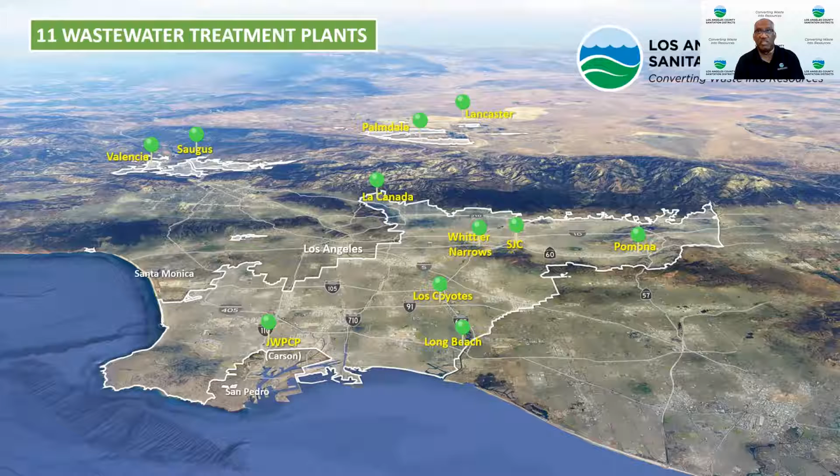From our humble beginnings, we now have 11 wastewater treatment plants. These pins on the map represent our 11 wastewater treatment plants. With our 11 wastewater treatment plants, we treat a little bit less than 400 million gallons of raw sewage a day. That's enough sewage to fill the Rose Bowl 4 or 5 times a day.

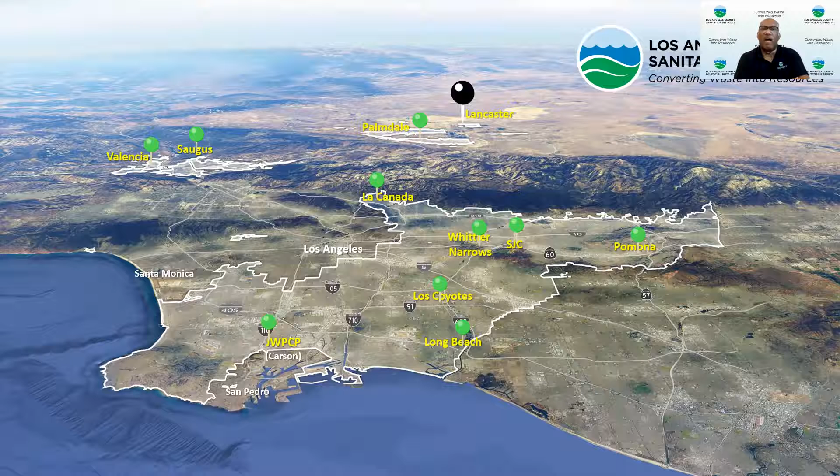And today we're going to focus on the Lancaster water reclamation plant. That's what you see with the black pin. And it's one of our 2 treatment plants in the Antelope Valley. And here's a great shot of the Antelope Valley from high up in the atmosphere. And so here's the Palmdale plant, which we toured last week, and here's the Lancaster plant.

Of our 11 wastewater treatment plants, these 2 are probably the trickiest to operate and manage, because our 9 other treatment plants in the southern portion of the county, when they produce recycled water, if they have excess recycled water, they have a water body they can discharge it to. They have a river or an ocean. These 2 don't, and that makes it really kind of tricky. If they have excess recycled water, especially in the wintertime, it's all discharged on land.

And it all flows to the northeast, and it winds up on Edwards Air Force Base from the Lancaster plant. And so we have to make sure every drop is accounted for. Every drop that comes in, we either recycle it, and if we can't recycle it or reuse it, we store it in a reservoir so it doesn't flow onto Edwards Air Force Base.

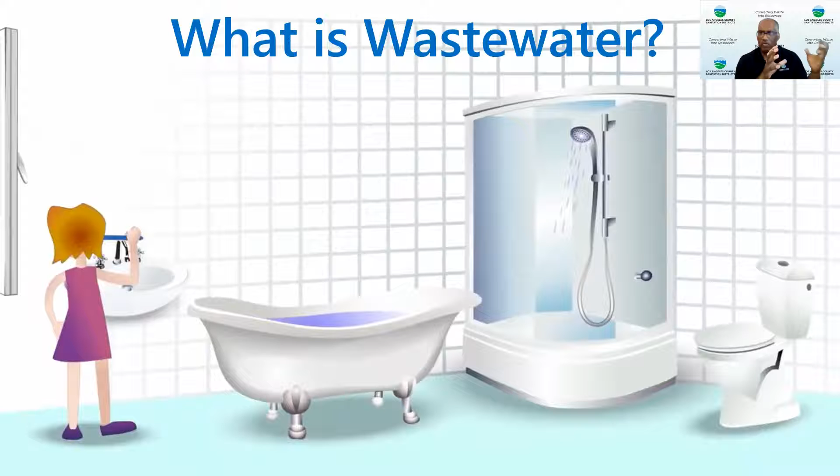So let's back up. What are we talking about? What are we cleaning? Wastewater or sewage? Most people think of it as the stuff that comes from your bathroom, your toilet, your sink, your shower. It's also what comes out of your kitchen. Whatever goes down your drain winds up at our treatment plant, and that's wastewater.

And how does it get to our treatment plant? Throughout the county, we have a network of trunk sewers, about 1,400 miles of trunk sewer. And that's how it gets to our treatment plant. But specifically, when sewage leaves your home or business, it leaves a lateral in your home, then it goes into a local sewer line that's owned by your city or the county. And then that local line feeds into a trunk sewer that's owned, maintained and operated by the sanitation district.

And I want to clarify one thing. We're not the county. We're a special district, like a school district, and we're tasked to handle wastewater. We call ourselves Los Angeles County Sanitation District because we serve Los Angeles County. We serve 78 of the 88 cities in Los Angeles County, as well as adjacent unincorporated areas, but we're not LA County. Our board, our bosses are the mayors and the city council people that sit on the respective sanitation districts, one of our 24 sanitation districts.

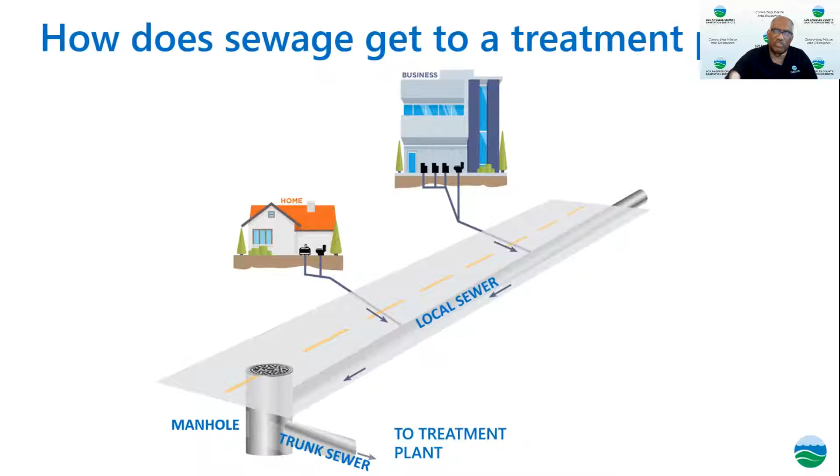And we have a shift that's usually here 8 hours a day. And in off hours, we remotely monitor this site. And if one of the valves or one of the displays goes awry, we'll send out an alarm, and we'll have someone come out, no matter what time of the day, to look into the situation and resolve it. Alfonso, do you want to add anything about the control room?

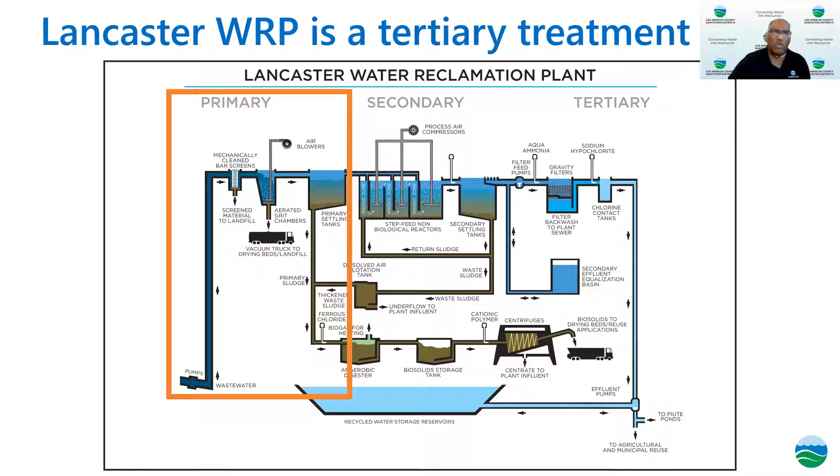So here's an influent pump building. This building has 5 pumps in there. They each pump about 10 million gallons, and they pump the water up to the ground level, and from there it starts the treatment process. So it lifts the water about 40 feet.

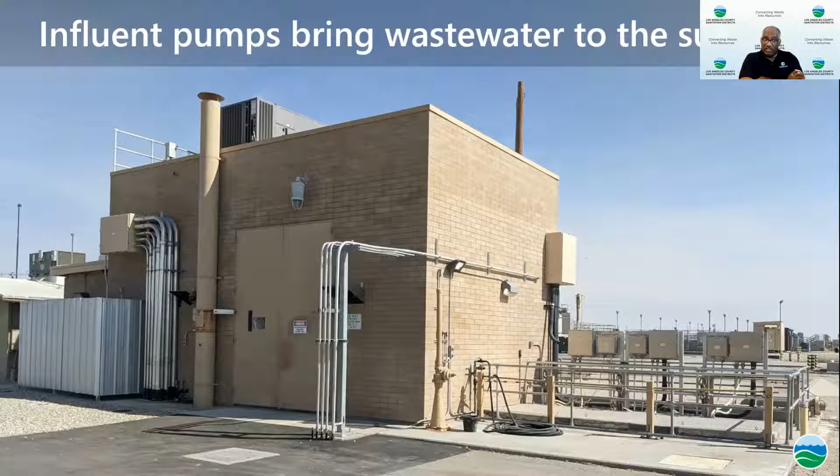I just like to add, our highest flow days is actually Thanksgiving, so we'll see from about 24 to about 30 MGD. So we have 5 pumps. So the plant on average treats what, like 14 million gallons a day? Yeah, 15 MGD. Okay, but during some of the high flow days, what do you see? Usually on the weekends, we'll see 21 to 24 MGD peak. And then, like I said, Thanksgiving will be from 24 to 30.

And then the highest wet weather flow, since I've been here, we probably peaked around 32, 33 MGD. So we need all those pumps. They provide redundancy when the flows peak up.

Correct. Hey, this may be a side, and I hope this is not a curveball, no pun intended. So do the flows go up when the Dodgers are playing? We actually do see, yes, higher flows during the Super Bowl playoffs too. Okay, so tonight you're gonna expect some higher flows at 5 o'clock. Yeah, probably higher ammonia load. No comment. All right. Thank you, Alfonso. Anything else you want to add? All right, no, he's good.

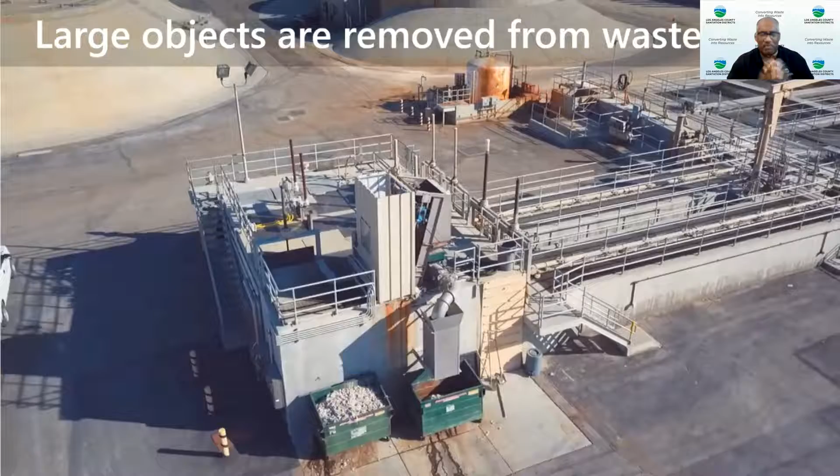All right, so influent pump building. And then we go to this building that removes large objects. You're looking at a drone shot. You have bar screens that remove large objects, rags, stuff that would clog up our pumps, that would require us to pull our pumps offline and declog them and reassemble them.

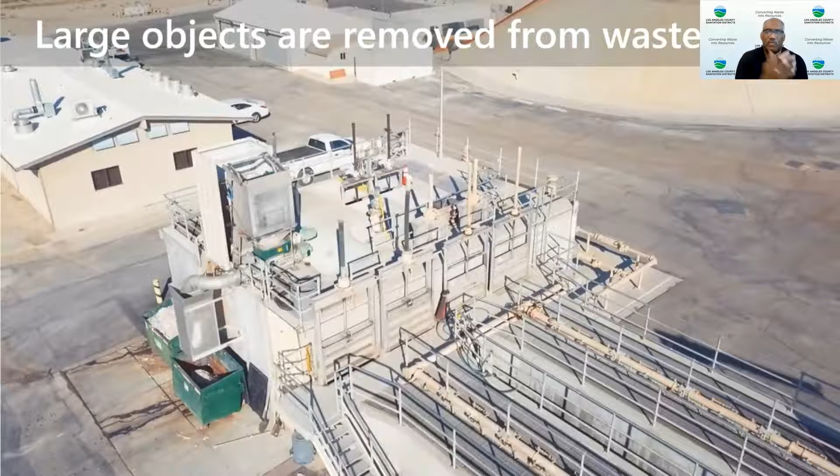Sorry, can you just quickly tell us what MGD is? Oh, my bad. MGD is million gallons per day. MGD, not a beer. Million gallons per day.

So in terms of Rose Bowls, you'll tell us. Oh, I'm kidding. No, later. You'll tell us in terms of Rose Bowls. Yeah.

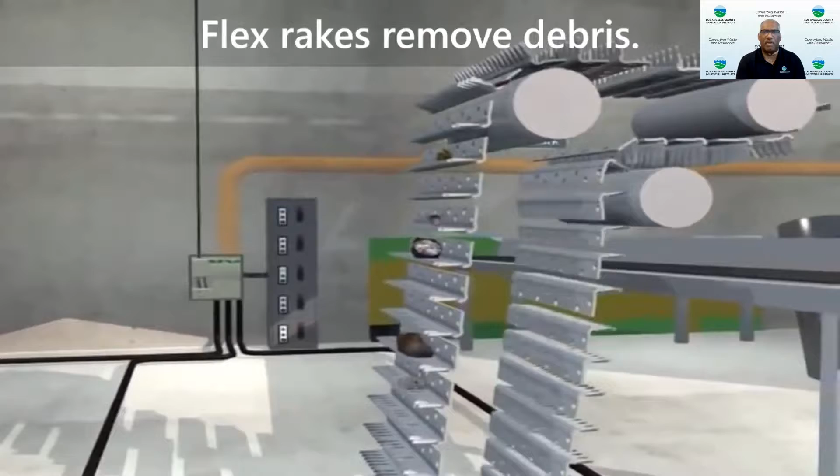All right. So here's what's going on in that building. We have these flex rakes that remove the debris. So basically they dip down into the water and they remove the debris because we don't want it going through the plant. It'll clog up the pumps. It creates a headache for Alfonso and the crew. And we have some actual footage. Usually on tours you don't get this.

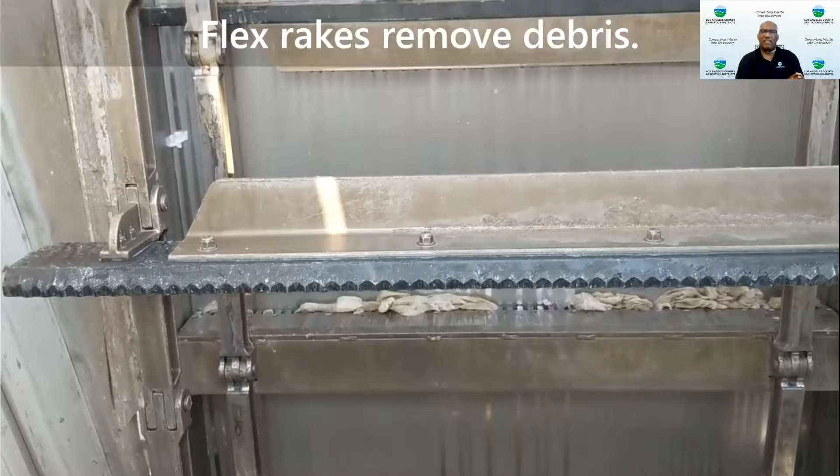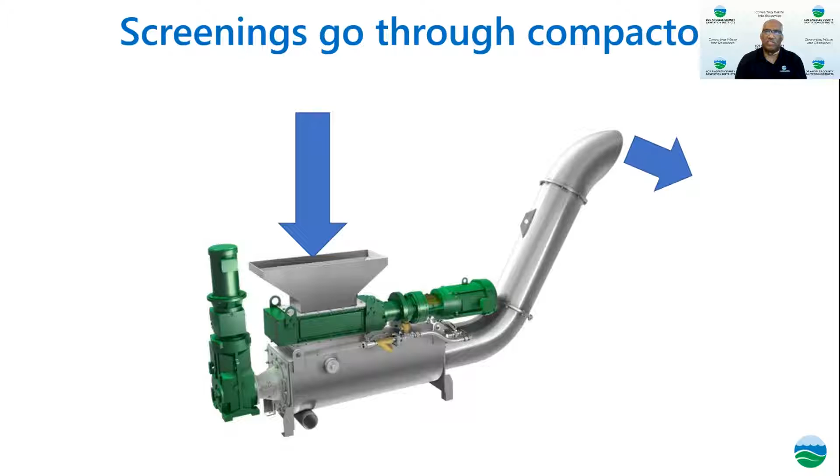So here's a flex rake, a real live flex rake at the Lancaster Water Reclamation Plant. And you notice the stuff that's on there. A lot of it is rags, and these disposable wipes are not disposable in terms of flushing down the sewer. We get a lot of that stuff. It goes into a compactor where it's ground up. And that's what it looks like.

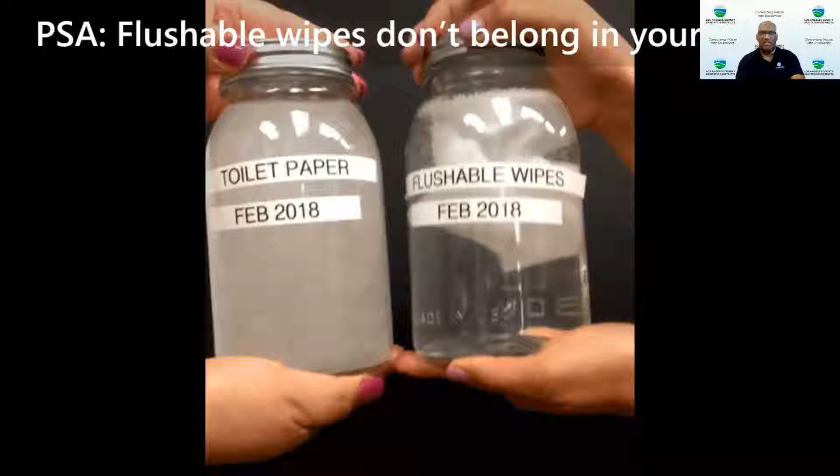These are flushable wipes. Just imagine this clogs up your sewer lateral, and that costs a ton of money to get someone to come out there and unclog that. It also creates a headache at the treatment plant.

And I think Alfonso wants to say a bit about that. Yeah, that includes FOG. We call it FOG: fats, oils, and grease. You don't want to put that down the drain as well, because as it goes down the drain, it's hot from after cooking, and then it hardens up or coagulates in the pipe as it gets cold. And so what will happen is they'll start wrapping around those flushable wipes, and it ends up being big grease balls. And so we get big grease mats, and it's just difficult on the equipment and trying to remove it from our pumps and stuff.

So only 3 P's should go down the sewer: pee, poo, and paper, toilet paper. And you can see here, this is an actual experiment. These jars are still in existence. They were filled in 2018. On the left, you see toilet paper and how it dissolves. And these flushable wipes, you can see they're still intact.

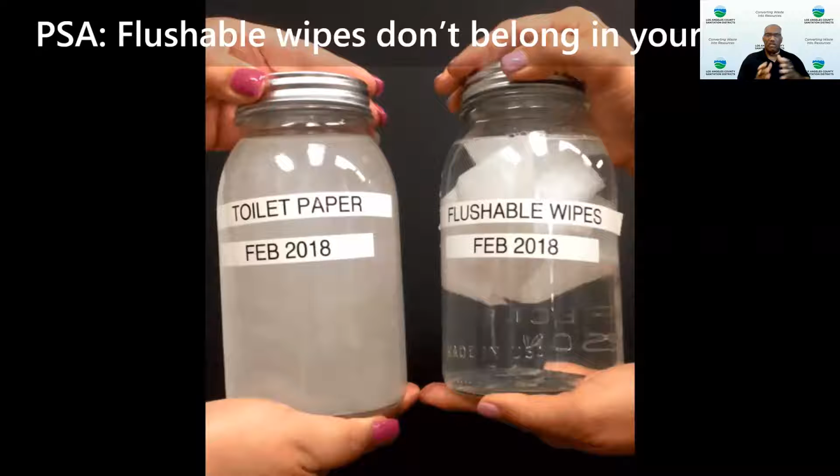And just recently, within the last couple of weeks, the state signed a law that requires by the middle of next year that these flushable wipes will have a decal that warns consumers that they shouldn't be flushed. Put them in the trash, because it's going to be a headache for you. It's going to cost you money. It's going to be a headache for all these treatment plants.

The purpose of removing the grit is so it doesn't cause premature wear on pumps, because it's very abrasive. Yeah, it's mainly like sand and eggshells. So it's almost like sandpaper just wearing down your equipment. So it's a huge cost saving to remove this grit. And so that's stuff that gets removed.

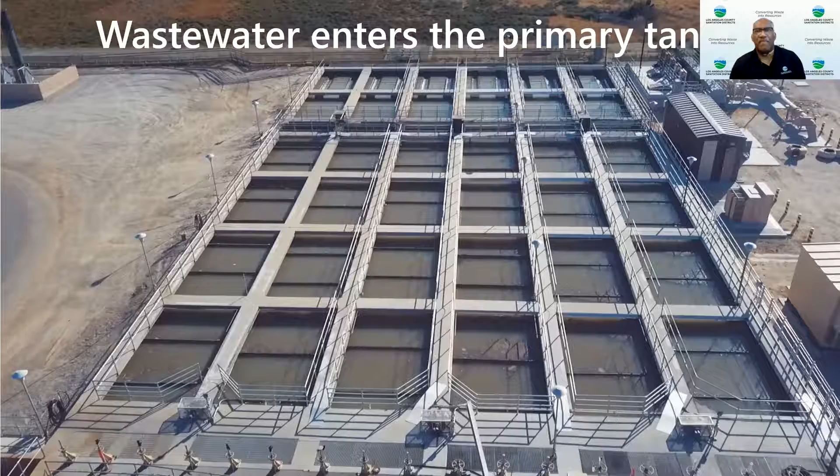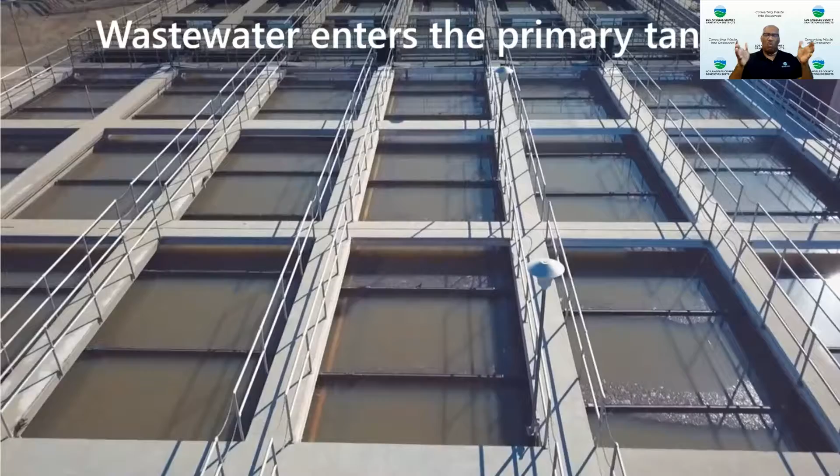And now once you remove the large objects and the grit, the water that comes in goes into these primary tanks. You see 6 channels here. And the water sits in these tanks for about 1.5 to 3 hours. We just slow it down. The heavy stuff sinks to the bottom. The stuff that's on top, we skim off. So a pretty good drone shot of the primary treatment. And when you hear primary treatment, it's just a physical process, gravity doing its thing.

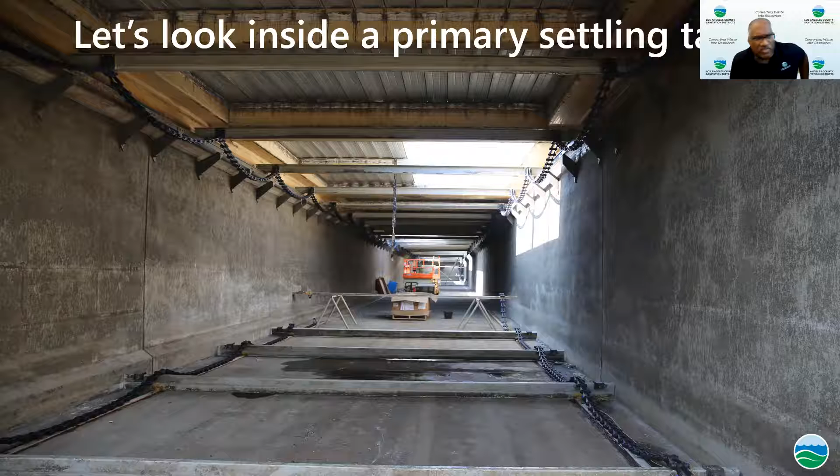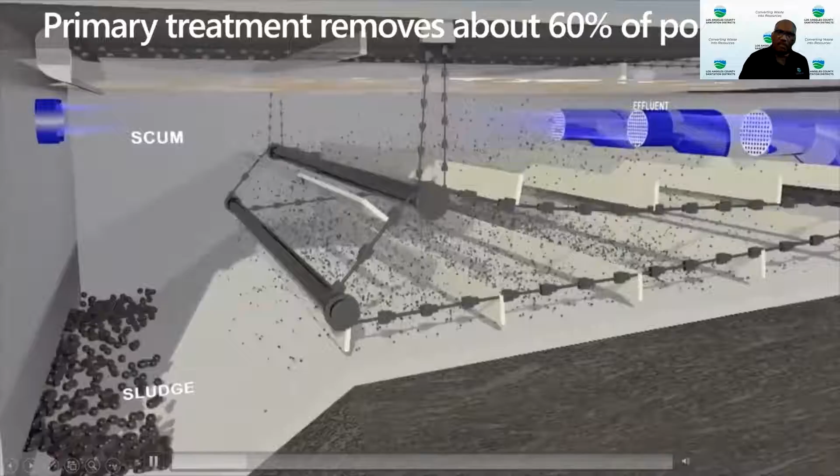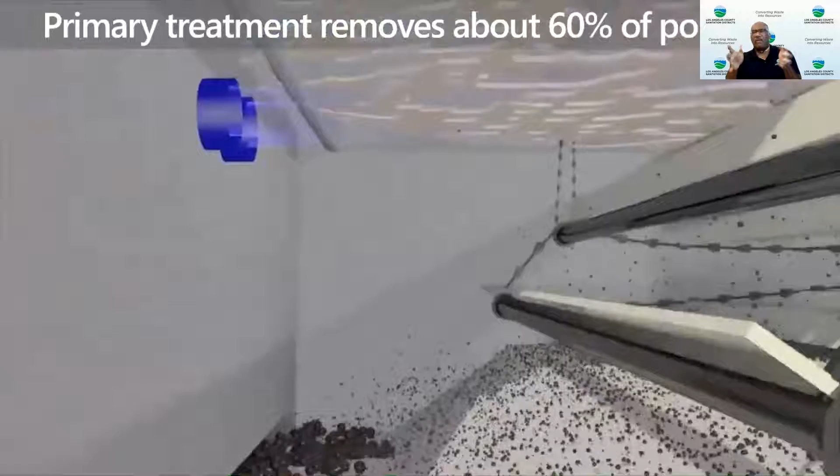So these are the primary tanks, and we have a schematic that shows how they work. See, the boards are on the chain. The stuff that's settled at the bottom gets pushed into openings at the bottom. The stuff that's sitting on top gets skimmed off. Just by doing primary treatment, you remove about 60% of the impurities or the pollution in wastewater. Just that simple process, in about 2 to 3 hours, you remove 60% of the impurities in that wastewater.

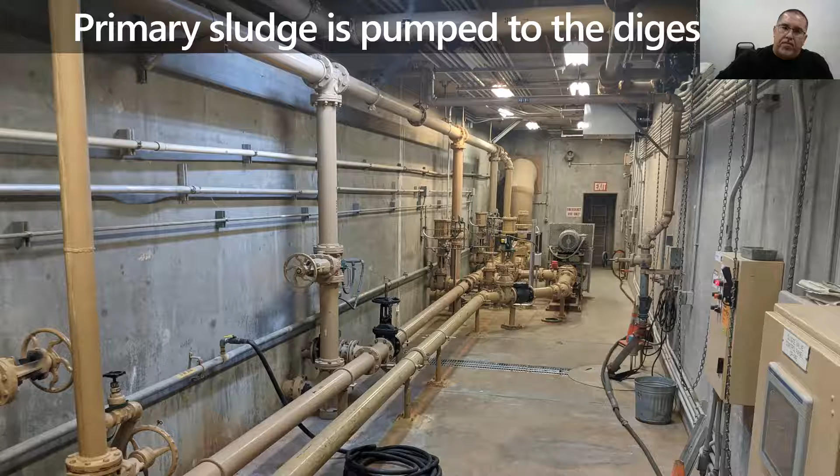And this stuff gets put in what we call the anaerobic digester, and we'll show you that later in the tour. So the sludge, the stuff that's been settled out, gets pumped to the digester. Fonz, you want to add anything? Yeah, part of the operator's job in the morning when they're doing their rounds is what we call a sludge judge. So they'll actually stick in a pipe that has a check valve on the bottom. It'll tell us how deep that blanket is.

And so we try to keep a 3-foot blanket in those primary clarifiers. And this helps us optimize the sludge thickness. So this way, when we pump it to the digesters, we pump it with a consistency kind of like oatmeal, so you don't have that much bound water in the sludge. You want to minimize the water that you pump to the digester, because we use boilers to produce steam to keep the digesters at about 98 degrees.

So less water, the better. So you pump when you get about a 3-foot blanket built up at the bottom of the primary tank? Correct, and it's all on timers. So we adjust timers, and it'll pump; we call it a pumping cycle. So every 72 minutes it'll go through a pumping cycle.

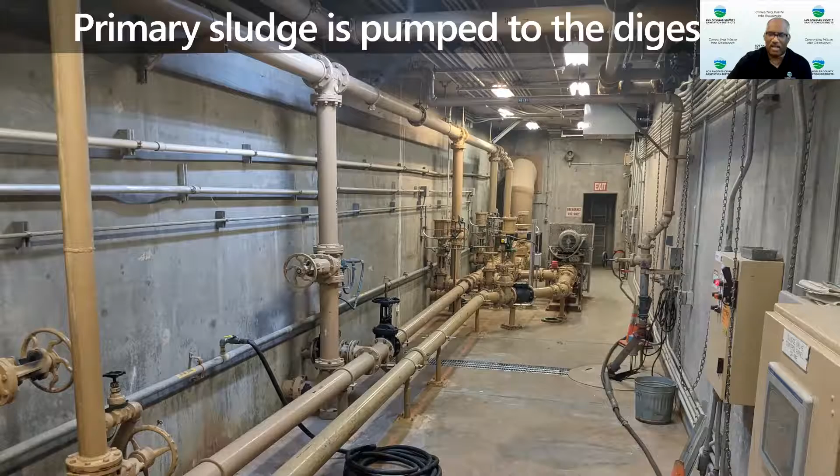Each primary tank will have its own depth. So we try to adjust the draw-off timers to maintain that 3-foot blanket. And this is rare. In a physical bus tour, you wouldn't get to go here. These galleries are underground. Yeah, you wouldn't get to.

So this is the water leaving the primary tank, and we wanted to give you, again, what it's like to be there. Just hearing the water cascading over these things called weirs. What we're doing is skimming that water off the top. We want to just subtly skim that water off the top. We don't want to create any eddy or turbulence. That's going to go to the secondary treatment process, which is basically a biological process.

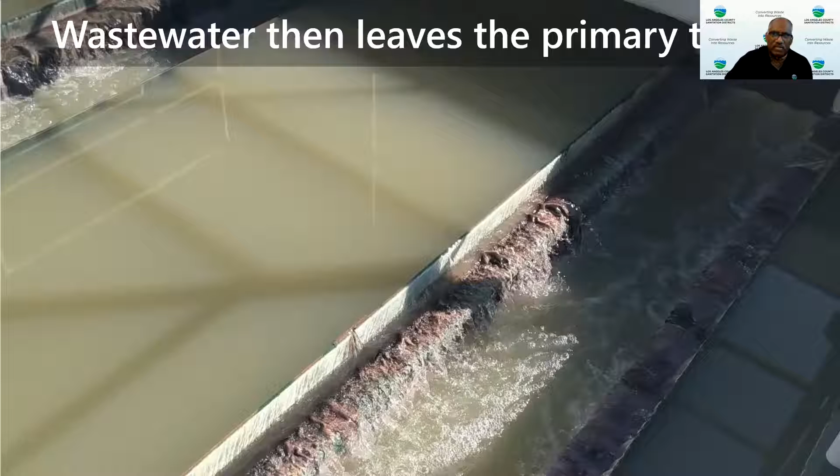So here we talk about secondary treatment. The water then goes into these tanks. Some are anoxic. That means that we don't have a lot of oxygen bubbling through them. So microorganisms that live in an oxygen-depleted environment take hold and they remove nitrogen or ammonia compounds.

And then we go into an aerobic or oxic zone where we bubble a ton of oxygen in, and those microorganisms then take over and they remove other impurities or materials, constituents in the water. And this whole process takes about 4 to 6 hours.

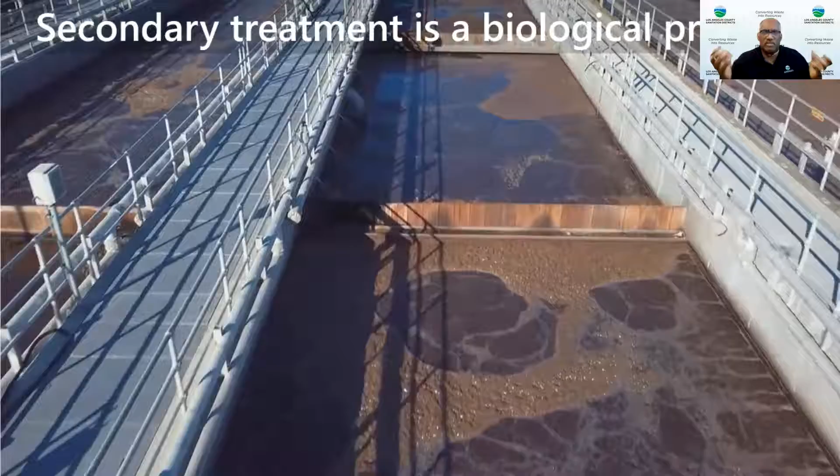Here's a shot of the secondary treatment. And here's a drone shot; notice the bubbles in the tank. That's an aerobic zone. We're bubbling oxygen through the bottom, and it's allowing us to grow trillions and trillions of microorganisms. They eat that material.

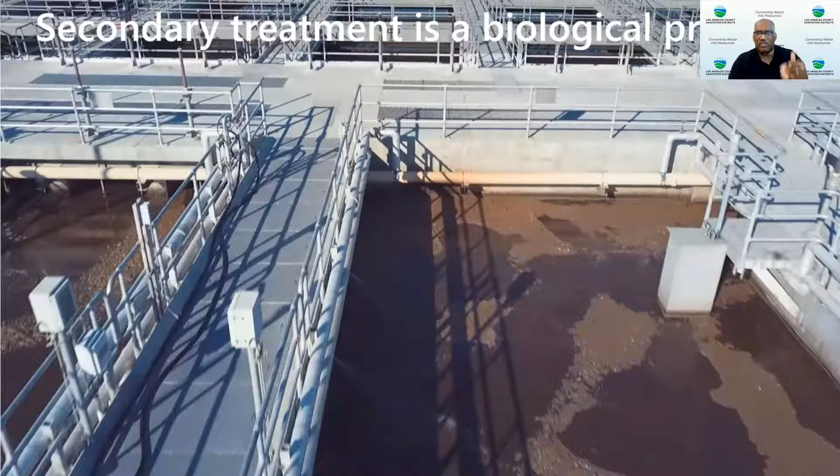And then we go to the area that's not bubbling, where we grow microorganisms in what we call an NDN process, a nitrification denitrification process, where these microorganisms are going to convert ammonia into nitrate, nitrite, and then nitrogen gas, so we don't have that in the clean water we produce.

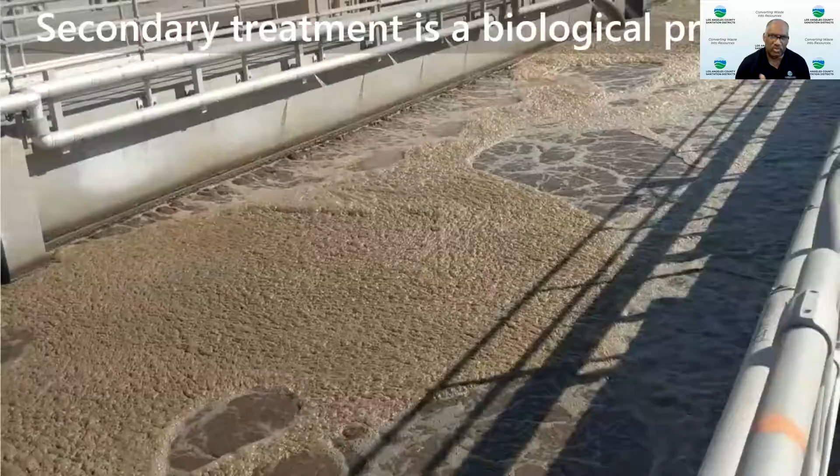Here's a ground level shot. And you can see the bubbling. We have discs at the bottom of these tanks bubbling oxygen through, so we can support trillions and trillions of microorganisms. And on an actual tour, we would walk along the railings and get a good feel. It's pretty interesting, it's pretty impressive.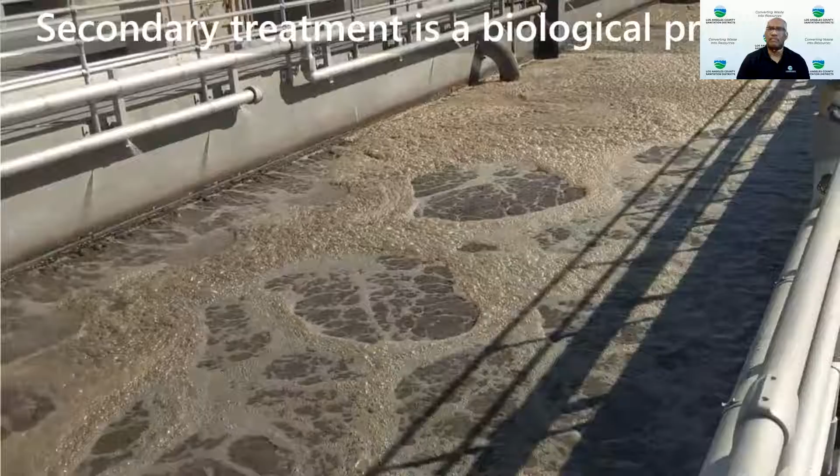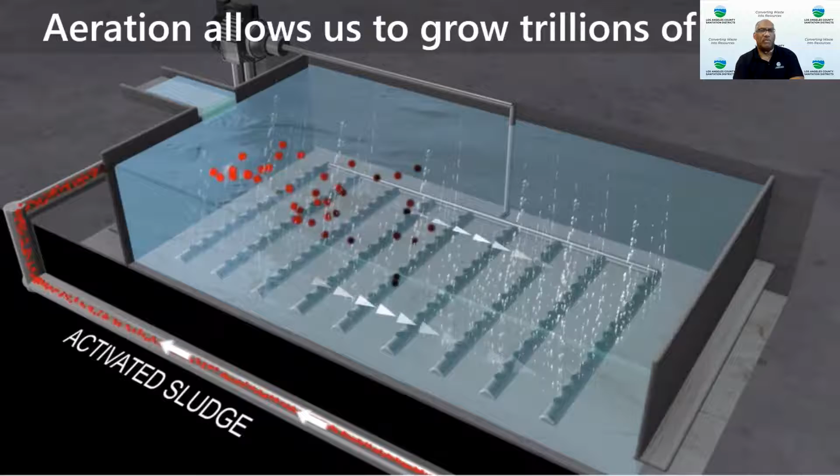And here's a schematic that shows you how it works. So the activated sludge is basically microorganisms that we've settled out and put back in this tank. And by bubbling oxygen through, we can have trillions and trillions of them. And here's an example of a microorganism that would be in the tank.

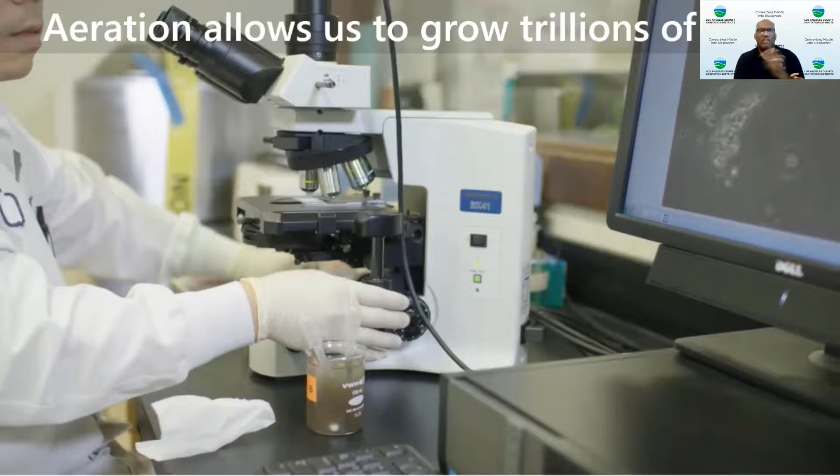This is a nematode, but we have bacteria, rotifers, and then we have a lab that collects samples to make sure the microorganisms are healthy, because this is the heart and soul of the treatment plant. They're removing the dissolved organic material that's in the wastewater. So we want to make sure they're healthy and hungry, just hungry enough so they'll eat the stuff that's coming through.

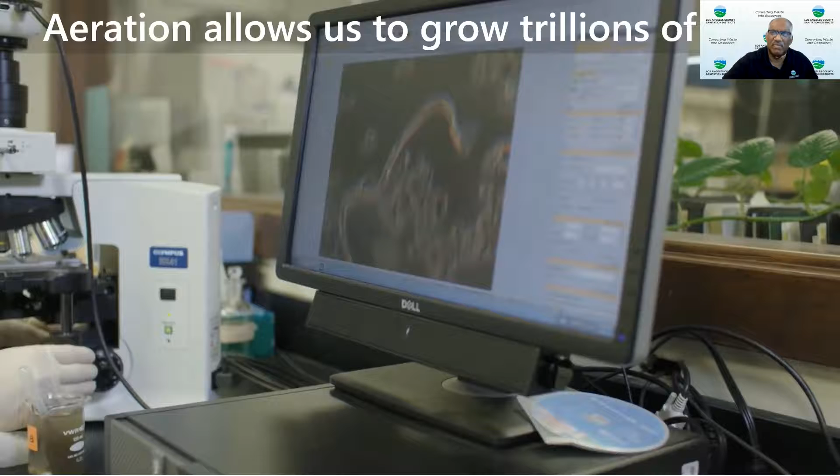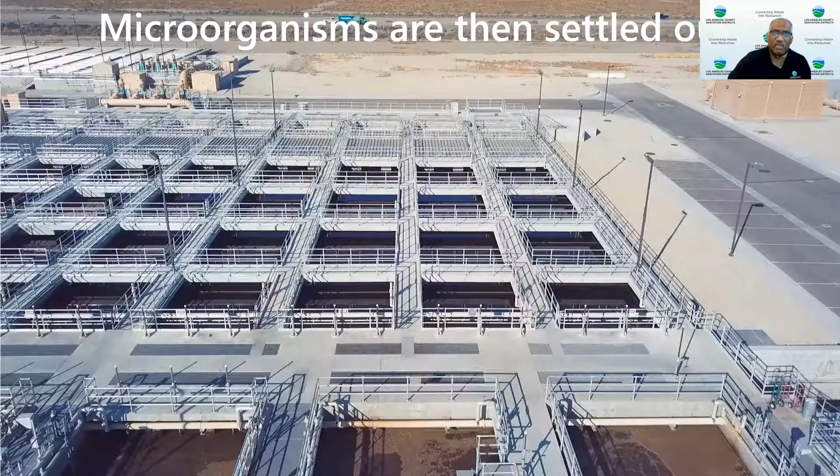And then the microorganisms are settled out. These are secondary clarifiers, and it's very similar to the settling that occurs in the primary tank, but in this case, we're settling out the microorganisms, and we're going to recycle most of them, and we're going to waste some of them as we grow more than we need. And notice the 14 freeway in the background.

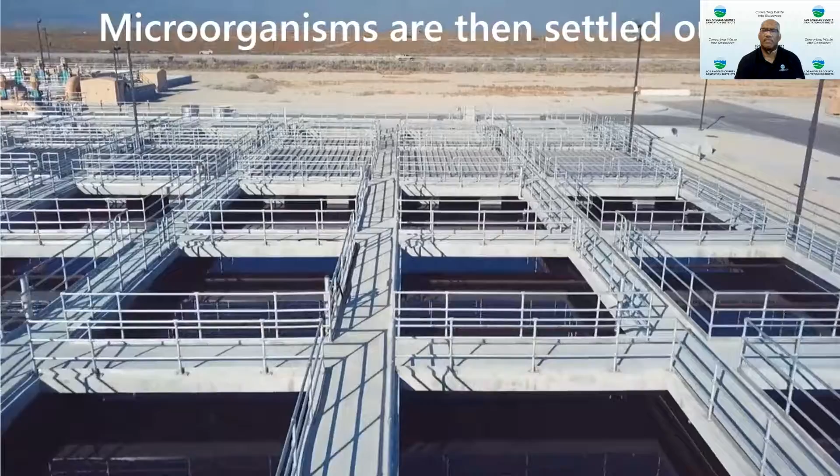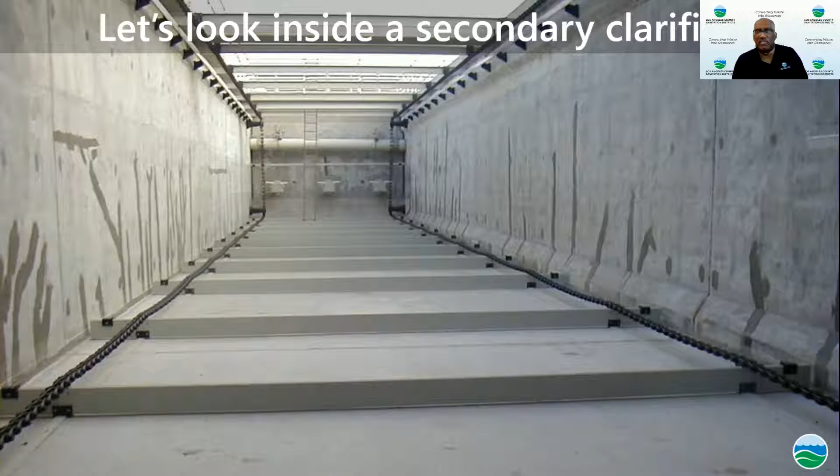And there's pretty clean water. These secondary clarifiers look very similar to the primary tanks you saw. When they're emptied, you see these boards at the bottom, flight and chain, doing the same thing. These microorganisms, when we feed them, multiply, and then they stick together, floc together, and they're slightly heavier than water, so they settle to the bottom, and then we slowly move them out. We slowly settle them out, recycle most of them, and whatever the excess, if we grow too many, we'll send that to the digester.

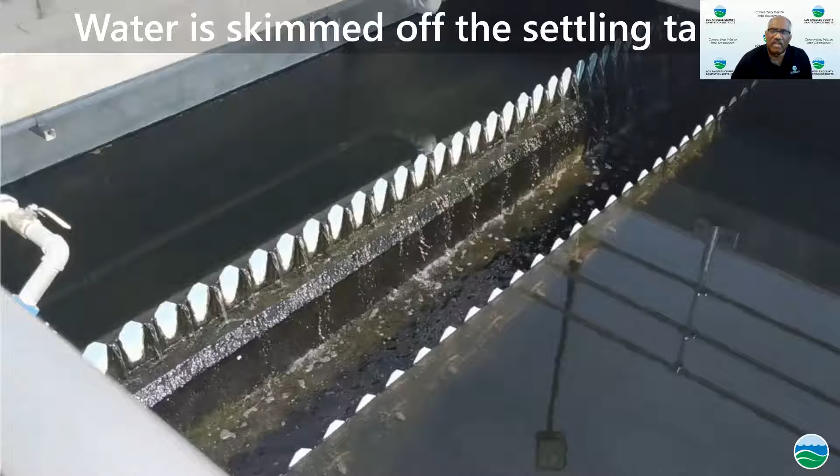Here's what that looks like at the end of secondary. So after it's gone through the whole secondary process, look how clean that water is. And those V-shaped deals, these are the weirs. Just like in primary, where you're skimming the water off the top, you're doing the same thing here. This water is pretty clean, but in the last step, we're going to clean it even further.

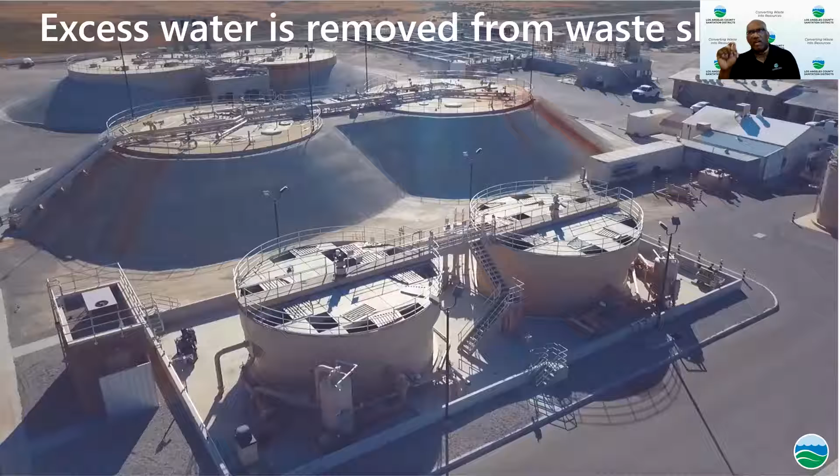So I talked about how we recycle most of the microorganisms, but we waste some of them. When we waste it, because we have more microorganisms than we need, we take it to these circular structures, which are dissolved air flotation buildings. What they're doing is removing some of the water from what we call the waste activated sludge, because we don't want to put all that water into our digester. It just doesn't make sense. It's not an efficient way to run it.

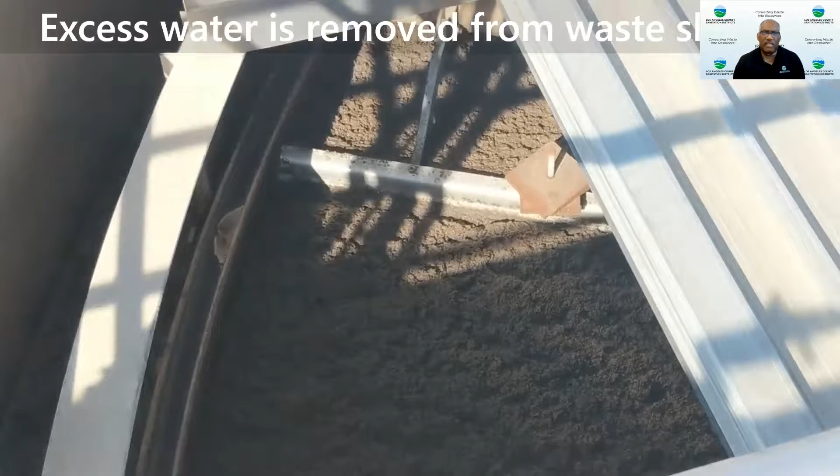So here's a close-up of this circular structure. We're bubbling air through this liquidy, kind of oatmeal material. It floats the solid material up to the top. We skim that off, and that goes into our digester.

And then here are our digesters. We have 8 digesters here at the Lancaster plant. They're set up in an anaerobic environment, basically oxygen-free, and microorganisms that live in that environment take hold and use the stuff that's been settled out in primary and secondary. That's a food source for them. They eat that. The material is in there for about 30 days, so the volume of material goes down. They kill pathogens while in there, microorganisms that would cause disease, and they generate methane and CO2.

We take that methane and use it to heat the digester, because we want the digester to be at about 98 degrees, whatever our body temperature is, because this is set up just like our gut. We use that methane to warm these digesters, because the Antelope Valley can get pretty cold, so these microorganisms that would be in our gut are doing their thing, breaking the stuff down. And if we have extra methane, or biogas, we'll flare it. You can see some shots of the microorganisms that would be in these digesters.

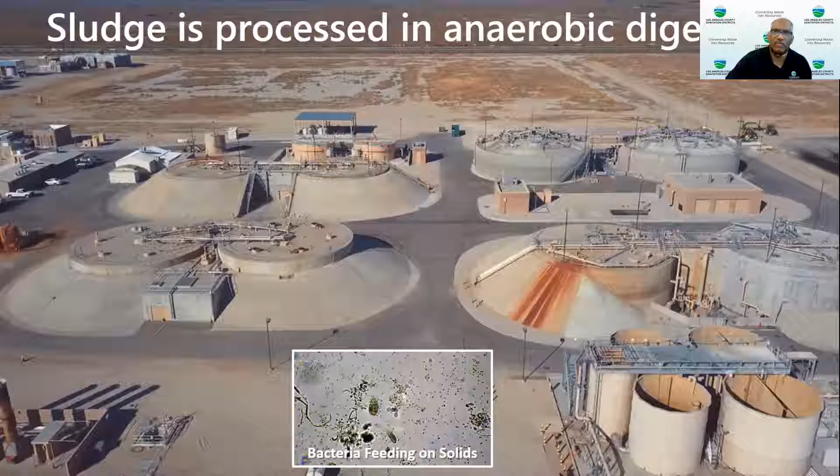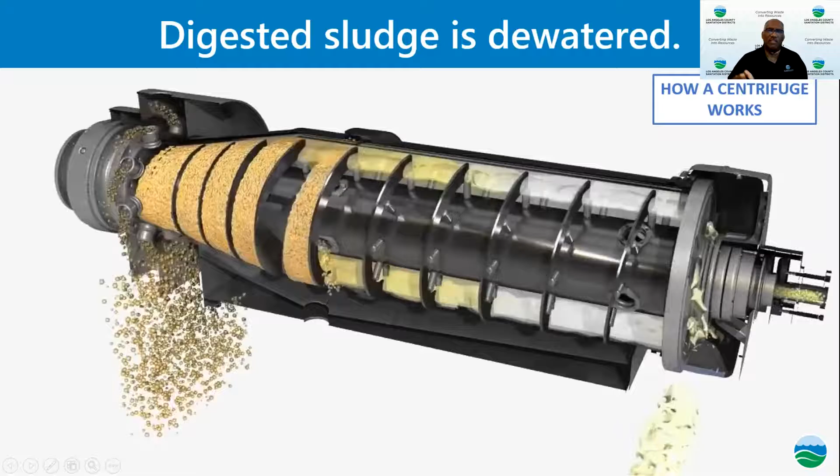So the stuff that comes out of the digester after 30 days still has a high water content. And again, we don't want to truck off a whole bunch of water. So we dewater that sludge with what we call centrifuges that you see here. Here's how a centrifuge works. The stuff goes in, it's spun like a washing machine. The water comes out the back end. The biosolids with a smaller water concentration go through the front end.

And here's the building where the centrifuge is. Let's play this drone footage. The building's about 2-3 stories tall. The drone makes everything look smaller, and the black stuff is the biosolids. It looks like crumbled chocolate cake to us. It has the consistency of Play-Doh.

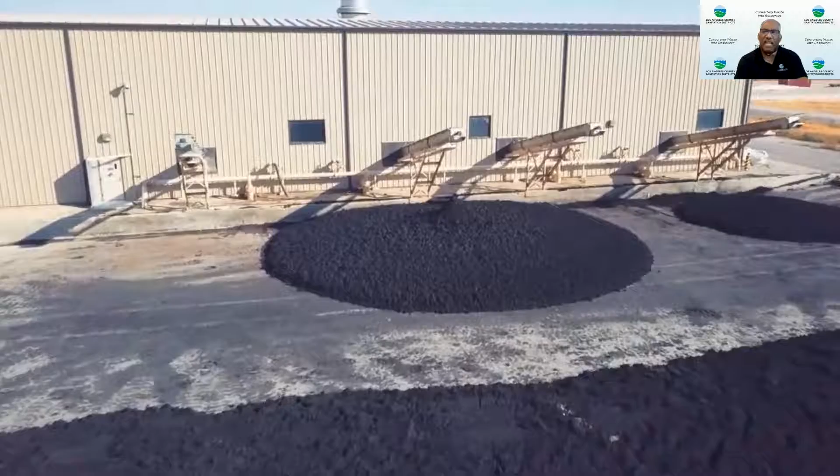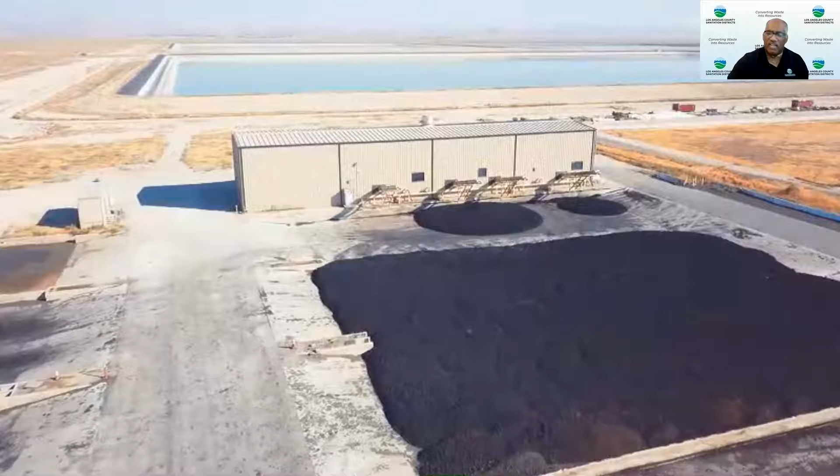Here's the stuff coming out of the centrifuge building. This will go into sludge drying beds. It'll dry there. Then we truck it off site, and it's composted, and we try to use it as soil amendment.

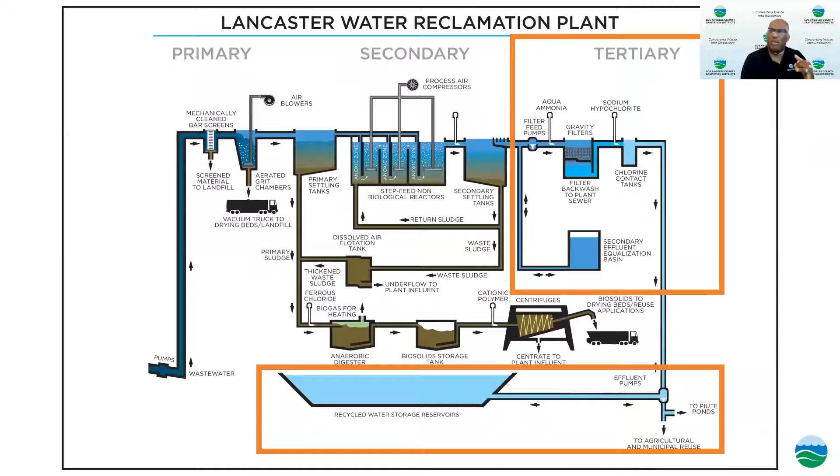So the last step is tertiary treatment. We saw how clean the water was at the end of secondary treatment. This last step, we're basically filtering and disinfecting the water before it's discharged, either to ponds or agricultural sites. But before it gets there, we send it to tanks. What you see here is water in these two what we call equalization tanks.

Because the flows go up and down during the day or even during the season, we want to smooth out the flows so the operators know exactly how much chemical to put in. We don't want to be chasing the peak. We don't want to over add or under add chemicals, sodium hypochlorite. We want to get it just right. By having these equalization tanks, we know exactly how much flow is coming in and how much chemical Alfonso and the crew have to add to make sure we're properly disinfecting and not over disinfecting, which again costs us and ratepayers money.

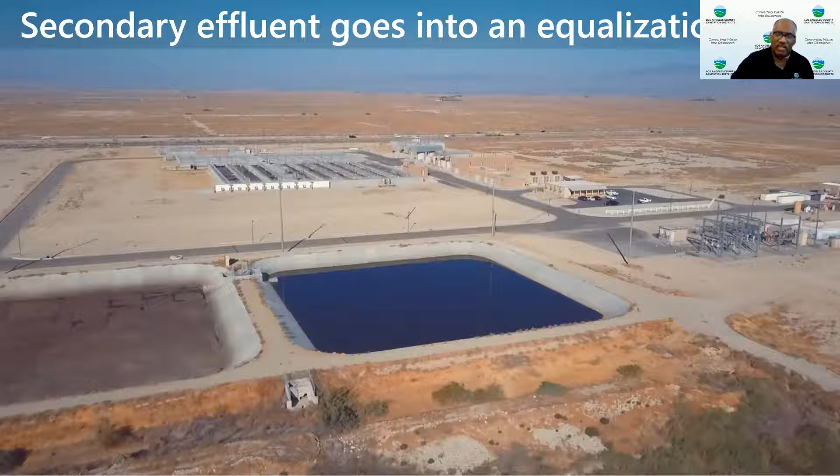Then the water, once it goes through flow equalization, goes into a filter. Here's the filter building that you see here.

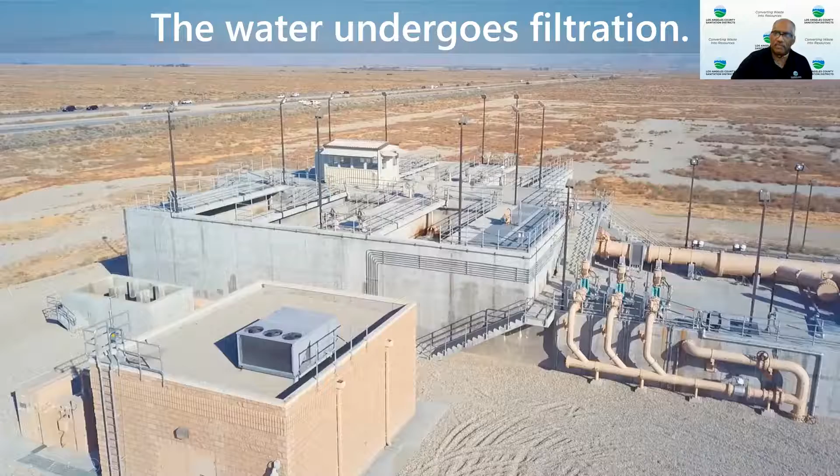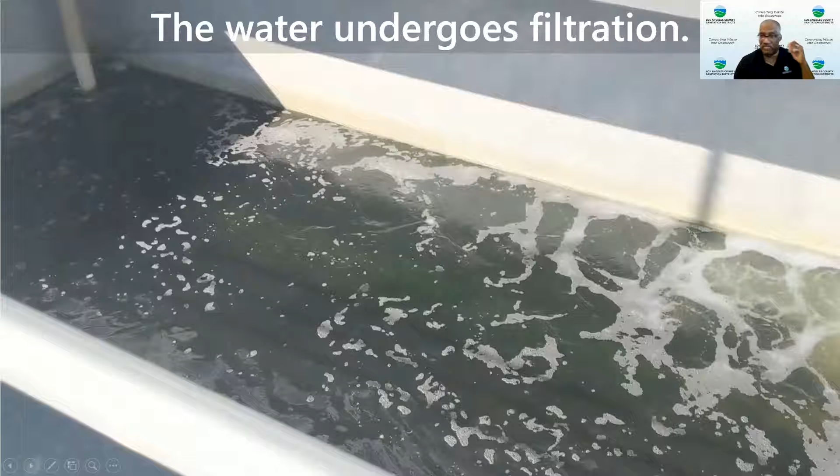So this is the water coming from the top down. This is the water that left secondary treatment. Here's what the filter looks like. Basically, the water comes top down. It goes through coal, sand, and gravel. It goes through there pretty quickly. And then it goes on to disinfection.

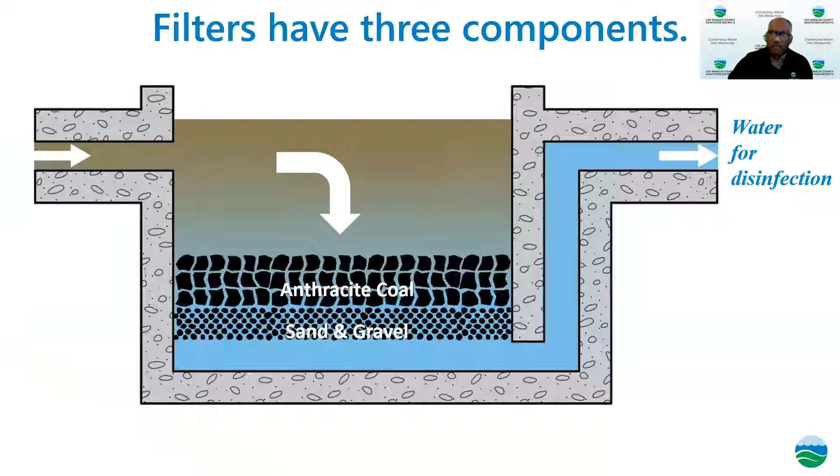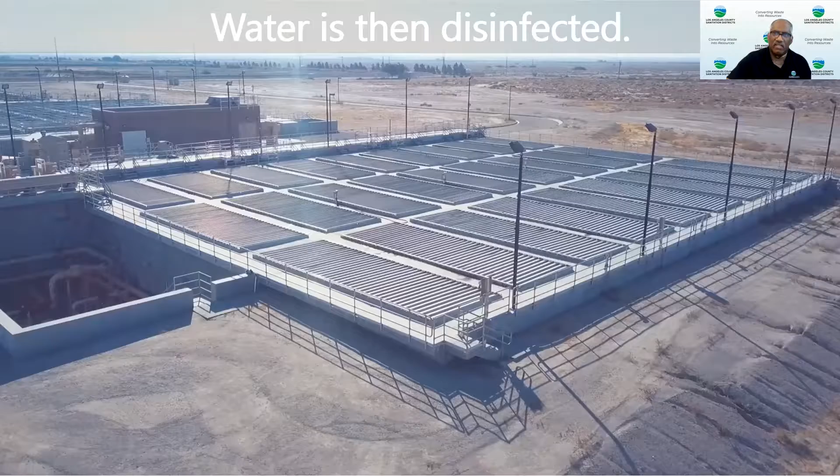So now it goes to the chlorine contact tank where we add sodium hypochlorite. It's in there for at least an hour and a half. And then we produce this water. It's like our little Niagara Falls. It's pretty amazing that it came in as raw sewage like 10, 12 hours ago, and this is what we produce after about 12 hours.

Hey, Alfonso, is there anything you want to add about the tertiary treatment process or this waterfall? Yeah, this cascade effect actually helps add dissolved oxygen back into the water, so we refreshen it before we send it out. Oh, very cool, very cool.

And then chlorine contact time, how long do you think? An hour? It varies from plant to plant. But for us, our minimum requirement is 90 minutes, so an hour and a half. So we have to always be above an hour and a half per our discharge requirement. Okay. So we just typically see about 150 minutes, which is over two hours. 2.5 hours. Yeah. Oh, very cool. So just mixing with the sodium hypochlorite.

Genesis, are there any questions that we should take at this point? No, not at this point. Okay, thank you, Genesis. Okay, Alfonso. So here you go.

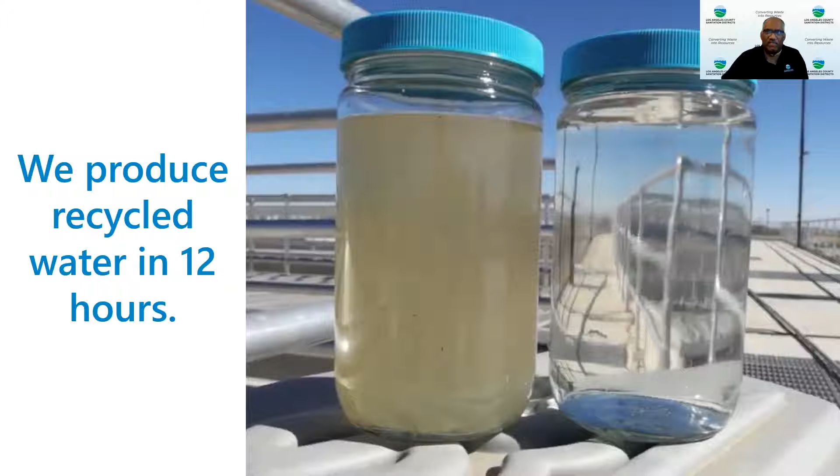We went from really gross to essentially drinking water. It's a pretty amazing job, and these guys make sure the plant's working 24/7, 24 hours a day, 7 days a week. So then what do we do with this water in this closed basin? Like I said earlier, every drop has to be managed. That's what makes Lancaster and Palmdale uniquely difficult plants to operate. Here's the Lancaster plant. Here are our storage reservoirs.

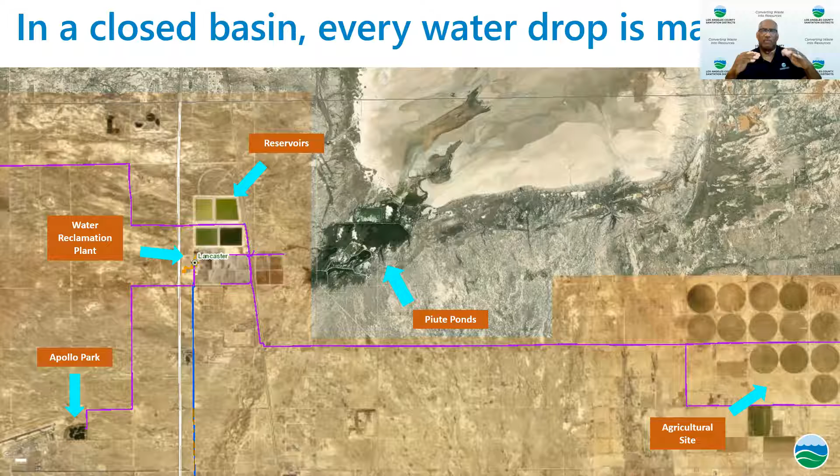As population increased, we started building storage reservoirs that you see here. And then in the late 60s, we started irrigating Apollo Park Lake that's here. As the flows got bigger, we had to build more storage reservoirs. And then we also purchased land about 15 years ago, about 7 miles from the treatment plant, where we take the water and use it to irrigate agricultural land, because the regulators, the people who give us our permit, don't want any extra water on Edwards Air Force Base.

So I'll step you through. The first one, Piute Ponds, is an amazing place. It's about 400 acres, created by that Avenue C dike, and there's all types of birds there. It's on Edwards Air Force Base property, and if you want access, you reach out through the base. During migratory bird season, there's just thousands of birds, and it's an amazing oasis in the high desert. That's just a little taste of Piute Ponds. A little bit less than 4 million gallons per day of the cleaned up water goes there to maintain that.

About 250,000 gallons a day goes to Apollo Park Lake. Those lakes over there are filled with recycled water from the Lancaster plant. And then here are storage reservoirs. These things are huge.

They store 1.3 billion gallons of water. And if you think about when you really need them, it's the winter months. It's times like this. Evaporation rates are low. It might have rained, so a farmer doesn't need water. A green belt doesn't need water. And we're not supposed to put it on Edwards Air Force Base. And so they're really full in the winter months.

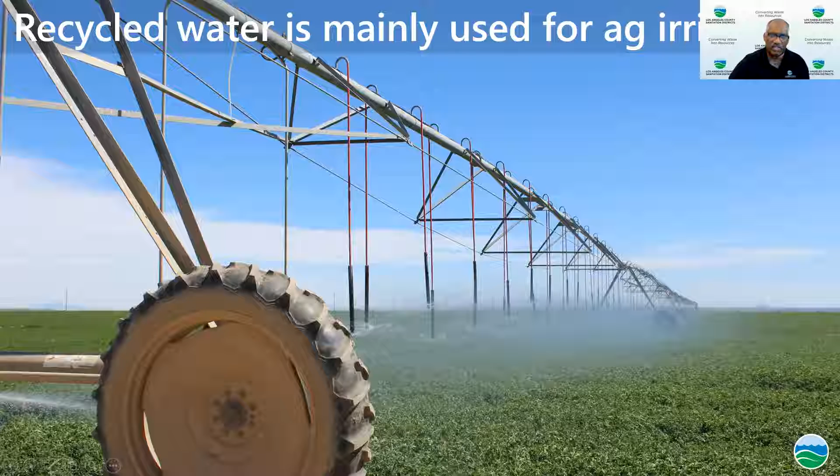Then a bit goes to the city of Lancaster. Throughout Sanitation District 14, the Lancaster plant, recycled water goes to about 68 sites throughout the area, one of them being the Kaiser Permanente building. And that's it. If you have any, we'll take questions now.

If you want nitty-gritty questions, you can talk to Alfonso. You can either call him or email him, or if you want to do a tour, we do school tours, we do sewer science tours for kids in the area, because we're not going to be working at the sanitation districts forever. So we want to make sure there are new scientists, engineers, public affairs specialists like Genesis, treatment plant operators like Alfonso to replace us. So with that, looks like Genesis is raring to stump Alfonso with tough questions.